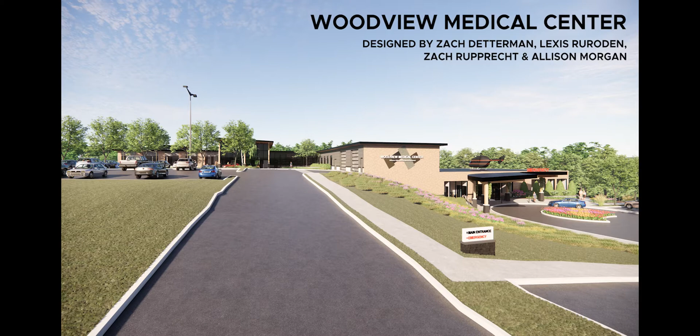The city of Adel and its surrounding communities are underserved regions for healthcare services. Currently, the closest emergency department is located in West Des Moines, Iowa, a 20-minute drive away. Additionally, there's a lack of preventative care in the area.

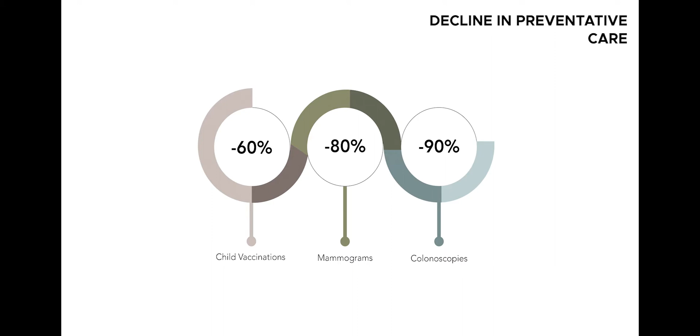According to the American Medical Association, preventative care declined during the height of the COVID-19 pandemic. Child vaccinations were down by 60%, mammograms were down by 80%, and colonoscopies were down by 90%. As a result, healthcare professionals promote telehealth to offer greater flexibility in healthcare and accommodate everyone's busy schedules. As Adel's population grows, demand for healthcare services will only increase.

Staff wellness is essential, and it heavily influenced our design. In the United States, 83% of hospitals provide workplace wellness programs, 63% offer health screenings, and 31% provide health coaches. To aid in staff wellness, we have implemented comprehensive programming into our building, such as an indoor fitness center, decompression rooms, and break rooms, to name a few.

Other design drivers go beyond staff wellness, including patient privacy, natural views, and daylighting strategies. We also use sustainable materials and include stormwater retention and filtration systems in our project.

We aim to empower individuals with preventative strategies for wellness by programming fitness and nutrition classes, providing healthier food options throughout the building, and including telehealth rooms to offer connections between patients and remote specialists to encourage preventative care.

As we began to develop our concept, we broke down elements needed to create our intended experience for all users. Notably, some critical aspects were creating a nurturing, connected, and secure environment that provides nourishment, balance, restoration, privacy, and comfort. These aspects together will allow us to create an efficient and welcoming healthcare facility.

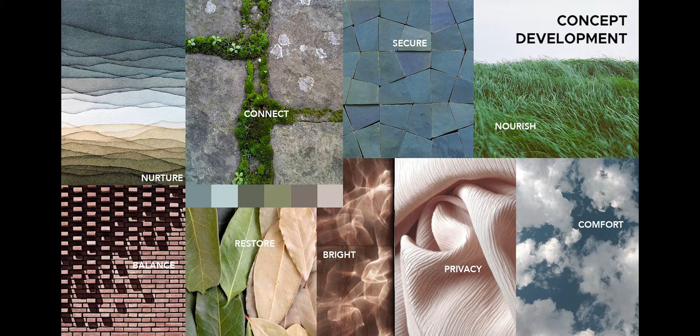With sustainability as one of our design drivers, we want to incorporate sustainable and durable materials throughout our design. Adel's brick plant allowed for locally sourced materials in addition to wood, stone, and concrete sourced regionally.

For the interior materials, it was essential to have durable and cleanable surfaces, such as a laminate wood veneer and bleach cleanable antimicrobial upholstery. For flooring, vinyl sheeting is used in high-traffic areas, while LVT planks cover personal spaces. Any wall covering within our building will be Type 2 vinyl wall covering, and paint colors associated with different departments aid in wayfinding.

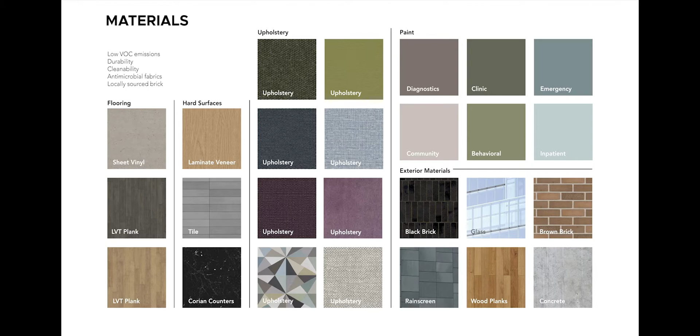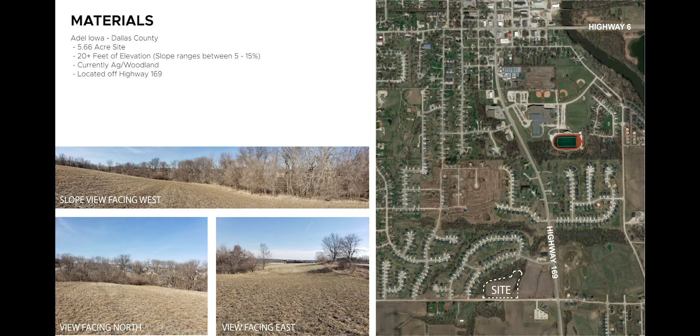Our site is conveniently located directly off of Highway 169. It is 5.66 acres and has 20 feet of elevation change, with slopes ranging between 5 and 15%. The site is currently agricultural and woodland, and we aim to keep it this way to provide natural views to our building occupants.

Our medical center is accessed via Meadow Road and has multiple points of entry. For patients, staff, and visitors, primary access splits into 2 roads to access either the main clinic entrance or the emergency department. There is also a service drive meant to deliver food, medical equipment, and a mobile CT lab.

Multiple gardens and walking paths have been incorporated for both patients and staff to enjoy. Walking trails connect between our several garden spaces and beyond the site to an existing trail system within Adel.

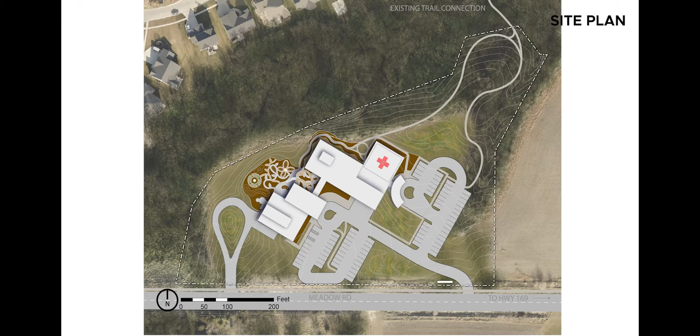Our building footprint started with an L-shaped design to hug our site and appear more welcoming to visitors during their approach. From there, we pushed our ground floor back to accommodate our site's slope, and we extended the corners of our footprint to fit in all of our departments.

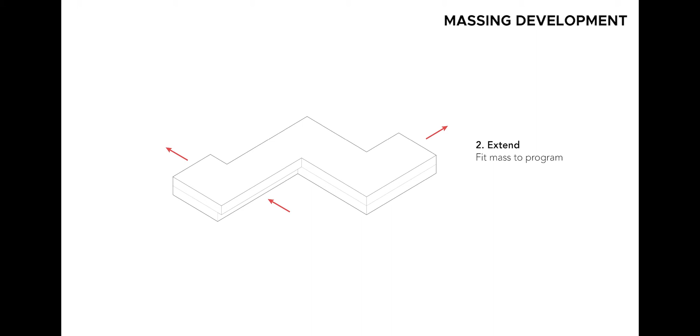We then subtracted portions of our first floor to allow for a rooftop garden and concealed helipad. We then decided upon our entry points and pulled those out to embrace our visitors and create a more prominent look.

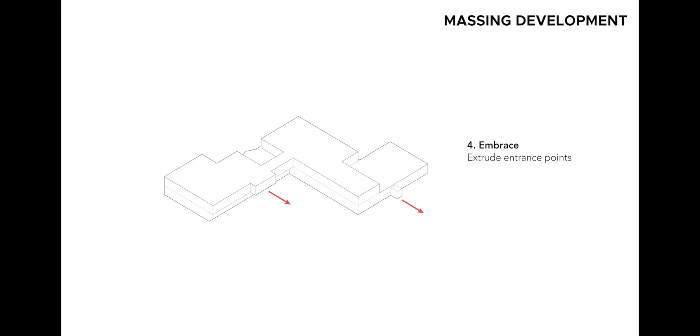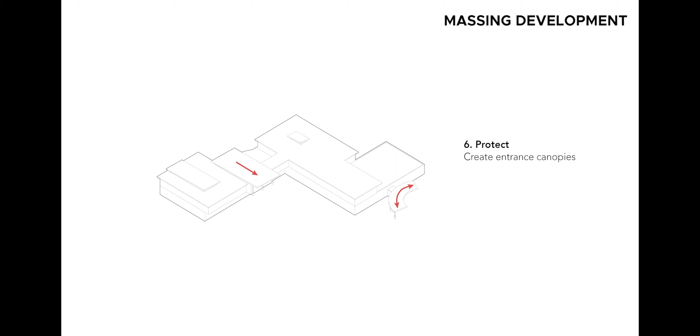To connect staff to daylight and nature, we placed clerestory windows above major work areas. Lastly, we included canopies over our entrances to make them even more prominent and protect our occupants from the elements.

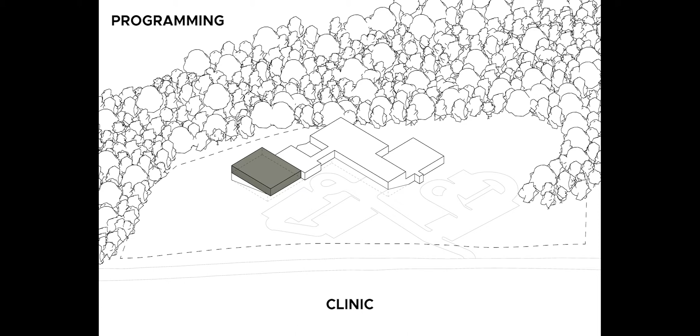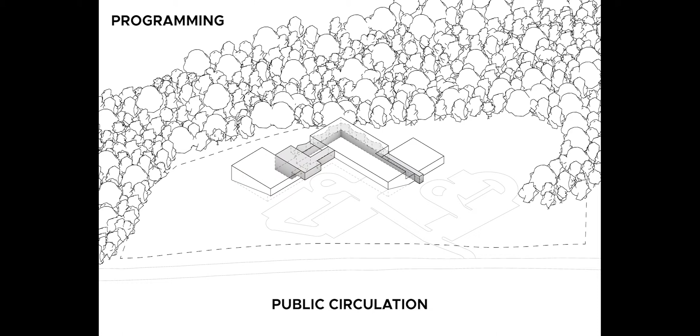Our building program is split into ground floor and a first floor. The first floor contains our clinic, rooftop garden, inpatient unit, ambulance garage, and helipad. Our lower level includes behavioral health, emergency department, diagnostic and lab, nutrition services, building support, and circulation bridging the 2 stories.

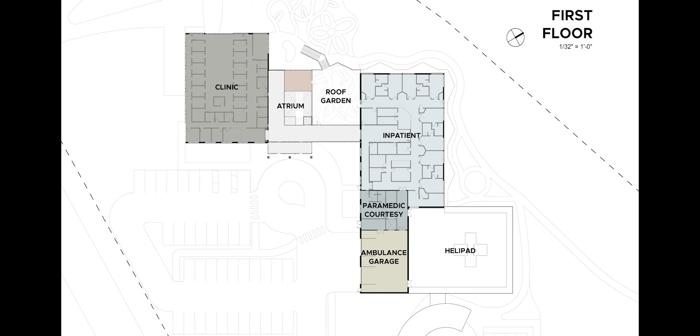The helipad is adjacent to the ambulance garage and paramedic courtesy, sitting directly above the emergency department and behavioral health department. On the ground floor, the emergency and behavioral health departments are adjacent to one another, with diagnostics and labs centered within the building.

The lower level atrium joins the community room and building support, which hosts staff wellness and nutrition services.

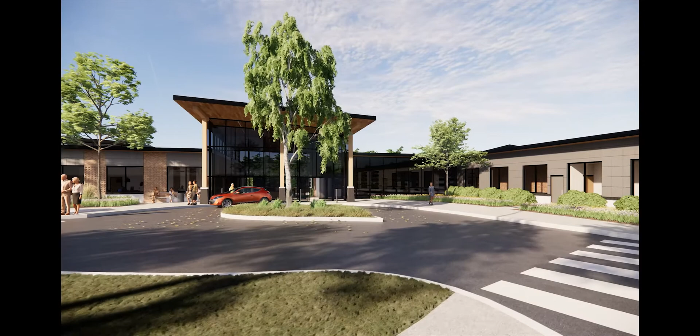Moving on to the main entrance, we have a large atrium that you are greeted with upon arrival. This immediately draws you in, and once inside, you can take a left to visit the clinic or a right to visit inpatient services.

The exterior materials here are brick, metal paneling, and concrete. This provides variety and a unique contrast that changes throughout the day with the play of light and shadow on the protruded bricks.

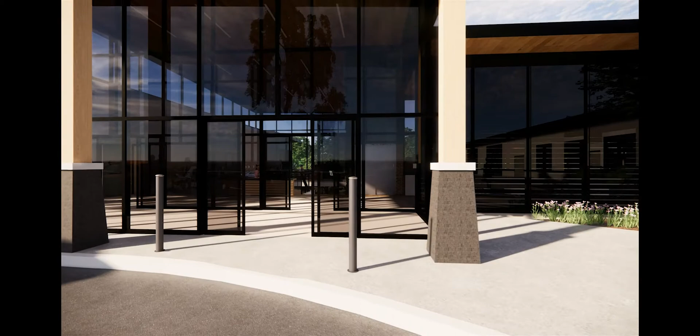Through the main entrance, a large atrium features multiple seating options, personal device support and charging stations, and a cafe towards the back. There are two points of entry for the rooftop garden that lead to a lower patio and garden space.

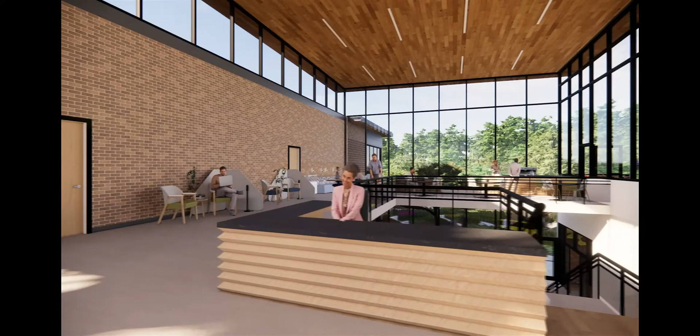Large windows provide natural views, encouraging users to go outdoors while letting in natural daylight. Integrating a green wall pulls natural elements indoors. Various seating preferences and group sizes are accommodated to be used by both patients and visitors.

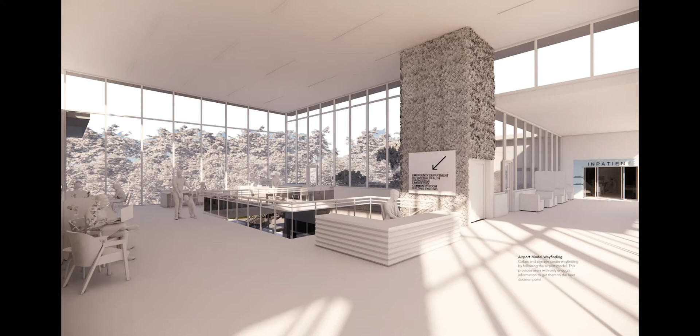Colors and signage create wayfinding by following the airport model. This provides users with only enough information to get them to the next decision point, lessening patient stress and confusion as they navigate the building.

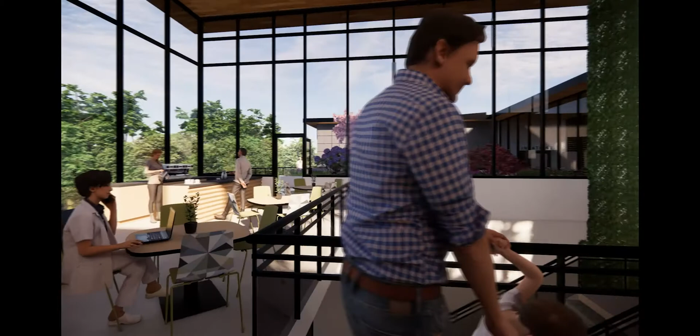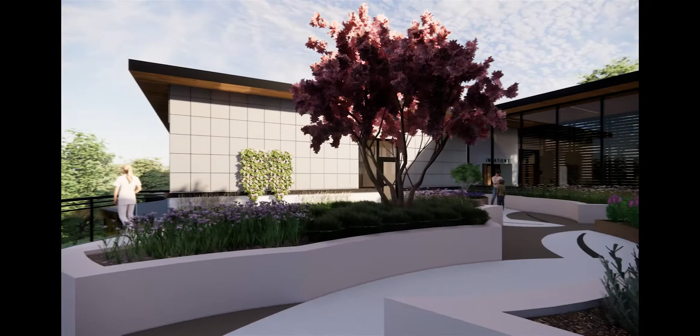Our roof garden is next to the atrium, highlighting design drivers of staff wellness and natural views. This is a place to go when patients and staff need a break, while also providing access to the lower level sensory garden.

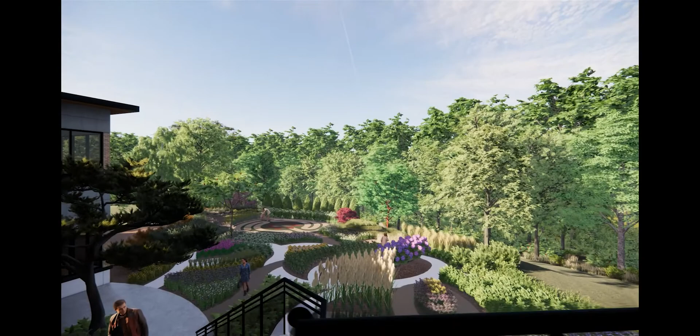To give independence and freedom to our patients, we provide self-rooming technology. The onstage-offstage model put in place here in the clinic allows for this by concealing staff work areas.

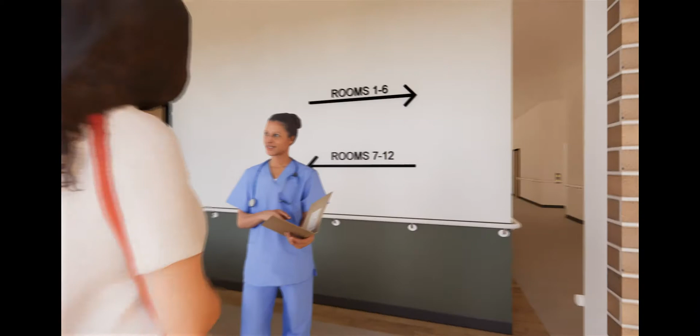As the patient ventures from the waiting area into the corridor, illuminated signage helps to indicate which room is ready for them to enter.

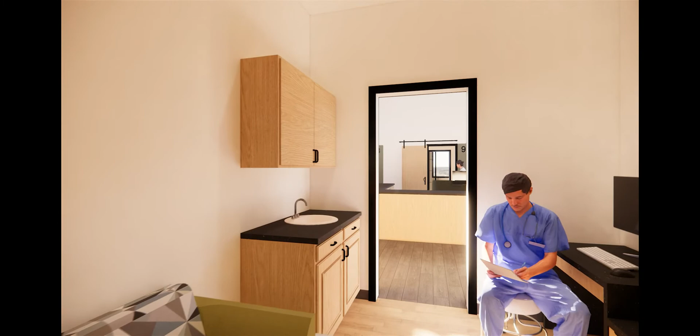Adjustable height desks stimulate productivity and feature privacy panels. Caregivers have a designated location for quick informal meetings without compromising sightlines.

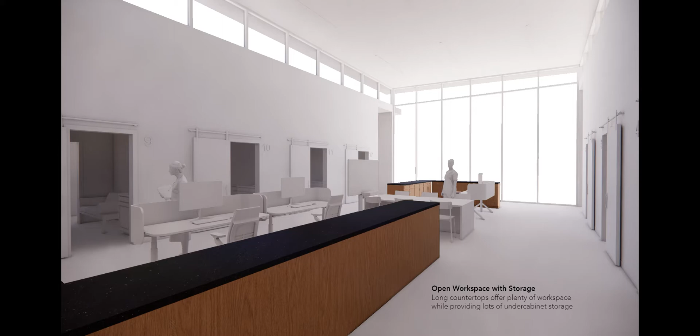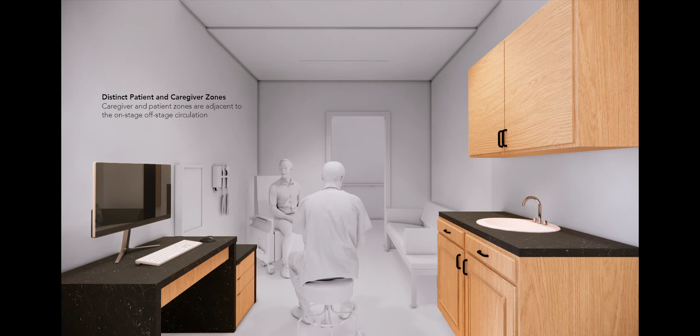Caregiver and patient zones are adjacent to the corresponding doorways for the onstage-offstage circulation, clearly defined by casework placement. Touchscreens can be used by caregivers to help explain medical terms and processes to the patients.

Hard surface allocates space for personal items out of the patient's way. Caregivers are at the same eye level as the patient and visitors when conversing. Bench-style seating is able to accommodate multiple visitors.

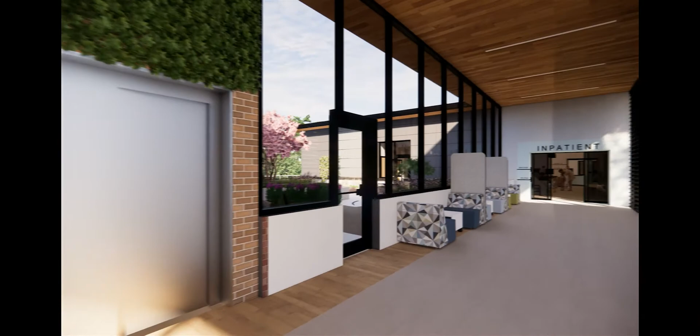The inpatient department is located close to the main entrance to provide easy wayfinding for visitors, while also being in close proximity to the emergency department for patients who arrive there and need to be admitted.

The patient rooms are aligned along the exterior walls of the department with an angled head wall to encourage patient views of the northern landscape.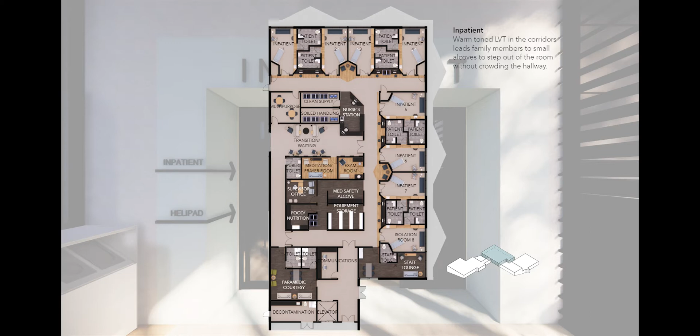A cornered nurse's station allows patient visibility along with windows at each patient room. Inpatient rooms and high-traffic corridors continue with neutral vinyl sheet flooring to highlight public access.

Warm-toned LVT in the corridors leads family members to small nooks where they can step out of the room for privacy without crowding the hallway. The dark LVT divides public corridors from staff-only hallways.

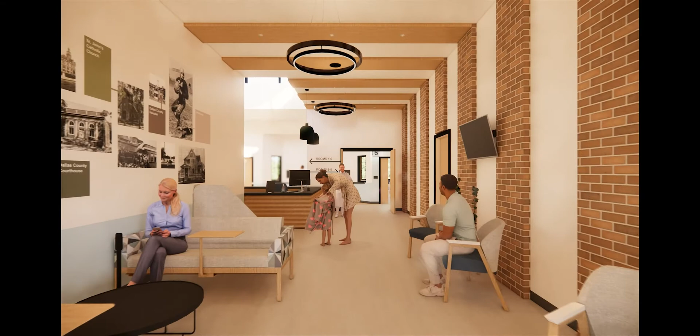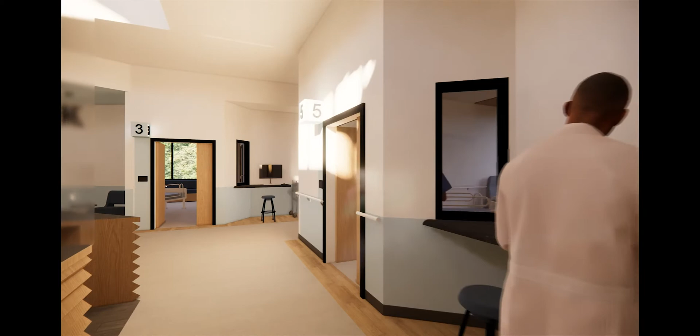Moving beyond a transitional waiting area, the inpatient rooms are adjacent to decentralized nurses' stations, with a window view into the rooms while also providing a designated space for carts in the corridor, keeping hallways clear for patients, caregivers, and visitors.

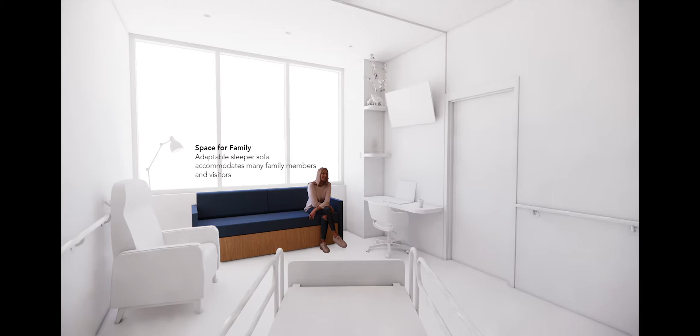An adaptable sleeper sofa accommodates many family members. Angled bed orientation and large window bays encourage the patient to enjoy the wooded views.

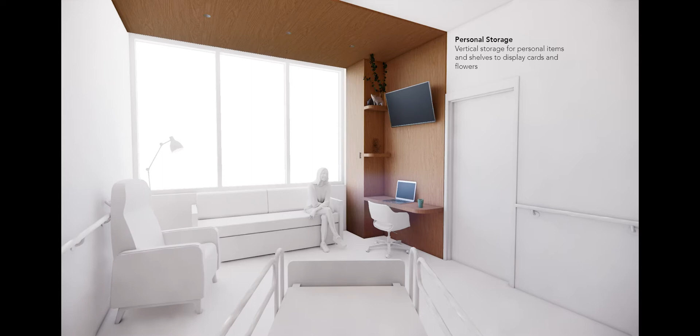This adjustable reclining chair is to be used by both the patient and visitors. Vertical storage is perfect for personal items, and open shelves allocate space for cards and flowers. A built-in workstation provides family members and visitors a place to be productive during long visits.

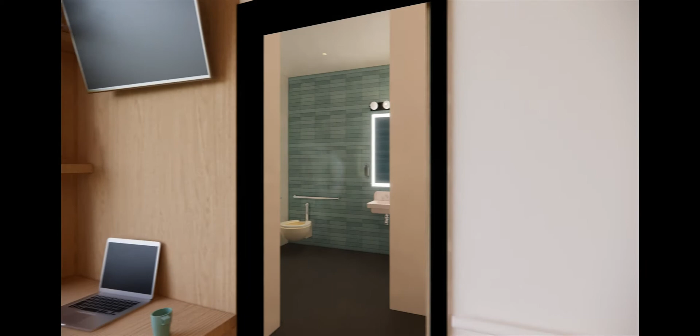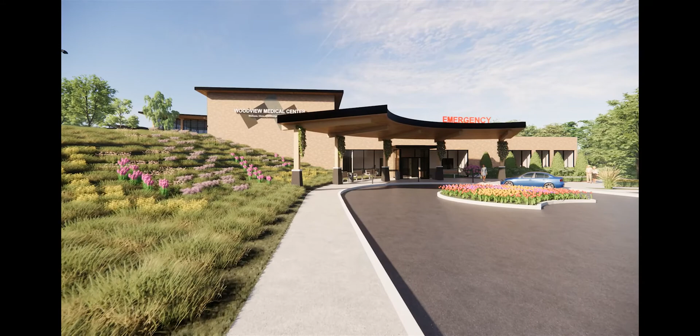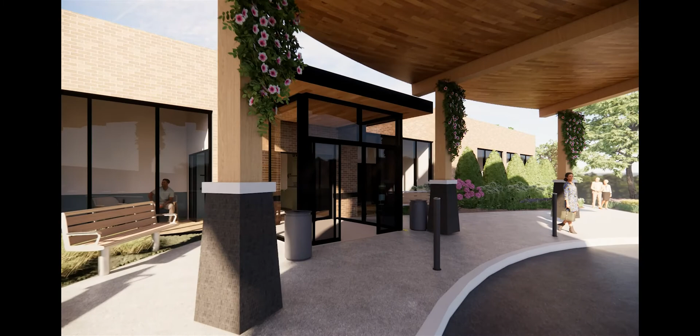The helipad is located on the roof of the building to provide an elevated flat surface for landing due to the site's complicated slope and quick access to the ambulance garage and emergency department.

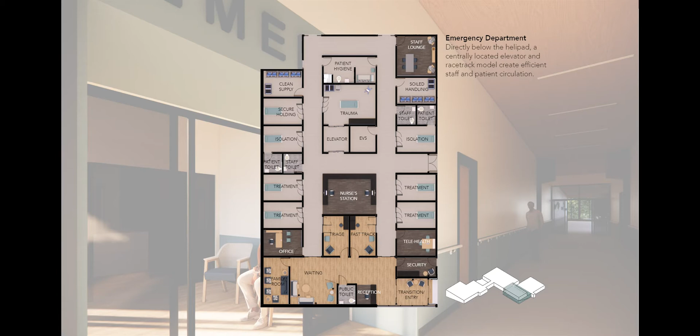Directly below the helipad, a centrally located elevator and racetrack model create efficient staff and patient circulation. Our racetrack model is highlighted with LVT flooring that pours into the treatment rooms, while the staff lounge, nurses' station, and other administrative work utilize dark flooring.

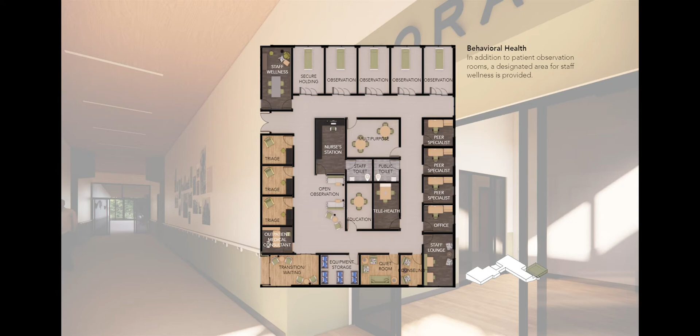Following our staff wellness design driver, a designated area for staff is provided in addition to patient observation rooms. This area is designed to be a check-in for staff where they can talk to a specialist and get a mental health screening. Like the emergency department, high traffic and multi-use spaces in this department are indicated with a neutral LVT.

The emergency department has a separate entrance to provide easy wayfinding and immediate access to ensure swift treatment times.

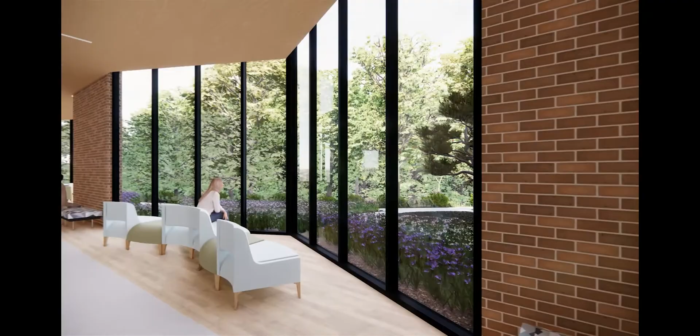We placed behavioral health in close proximity to the emergency department in order for critical patients to be nearby essential services.

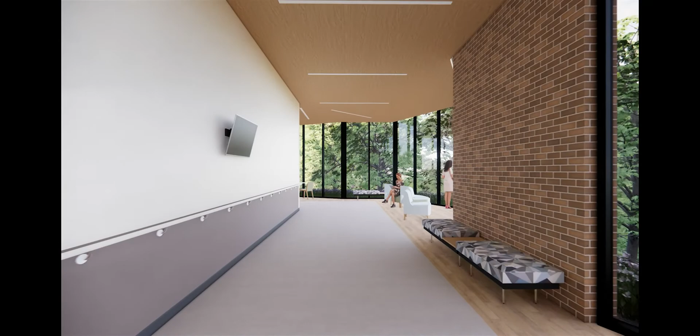To allow for staff flow and surge from the emergency department, diagnostics are located nearby to allow short staff travel distances and faster diagnosis.

The diagnostic and laboratory offer many important spaces such as radiography, CT, and mammography. Most of the flooring in this department is vinyl sheets for increased cleanability, and few staff spaces reside in this department due to the adjacency to the staff break room.

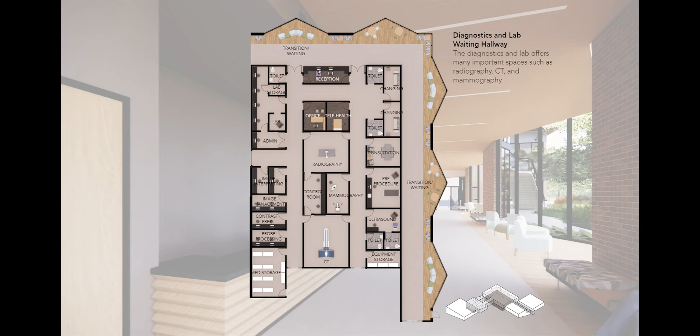The large hallway adjacent to this department creates an adaptable space that provides various seating for waiting. This space can be easily converted with privacy screens to accommodate for testing or vaccinations. LVT planks show the self-rooming patients where they can pause and wait.

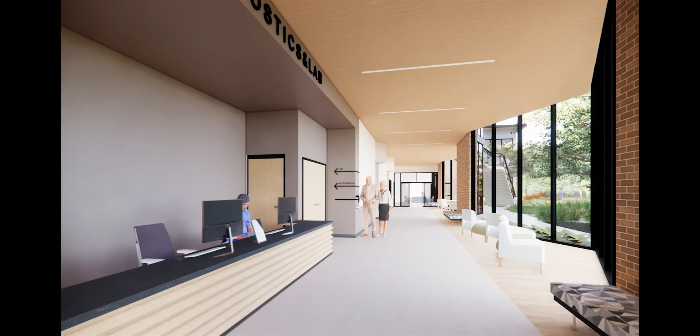In order to provide better patient and visitor access, the cafeteria is located off the main atrium, while the food storage spaces are located in the building systems zone near the loading bay.

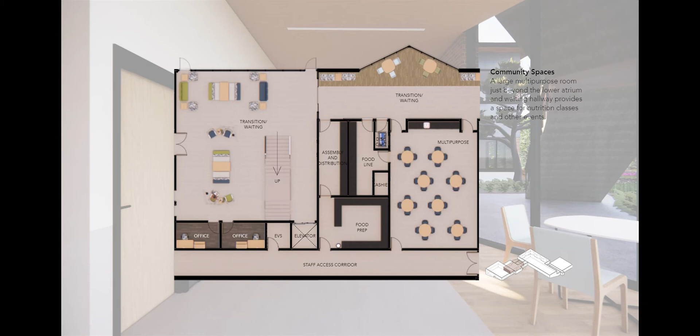A large multi-purpose room near the lower atrium and waiting hallway provides a space for nutrition classes and other events. To provide an adaptable space, food services are adjacent to accommodate dining services for events.

Building support can be accessed by the service drive for food and medical equipment deliveries. This department is occupied only by staff, so a large staff break room and wellness amenities have been incorporated to allow for natural views and rejuvenation away from the busy corridors and patients.

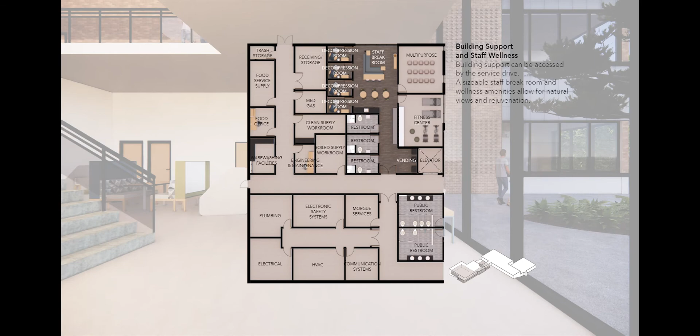Due to the traffic of carts in this department, general vinyl sheet flooring has been used for durability and cleanability. However, the staff break room and decompression zones are indicated by a darker LVT flooring.

The main landscape on site is located directly off the atrium and roof garden spaces. This planted area allows respite to all users, whether they're staff on a stressful shift or patients waiting for lab results. Plantings provide sensory stimulation, and intimate spaces are inserted periodically along the paths to allow for privacy and quiet contemplation.

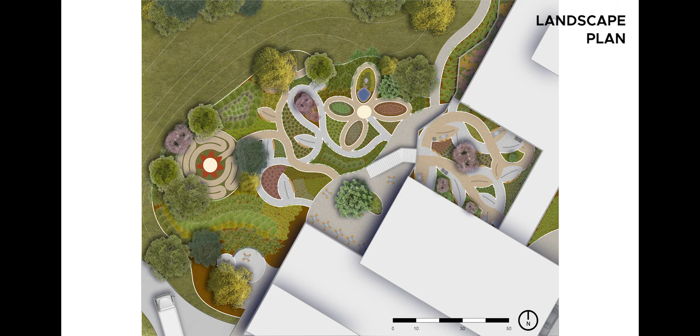From within the landscape, visitors are surrounded by greenery, and features such as this labyrinth quiet a racing mind. Plantings provide sensory interest, and pathways encourage exploratory wandering.

The makeup of the exterior materials consists of brick, metal paneling, and precast concrete. In order to add texture and depth to the facade, we rotated every third brick 90 degrees so they protrude outward from the wall. This will add interesting shadows to our exterior throughout the day.

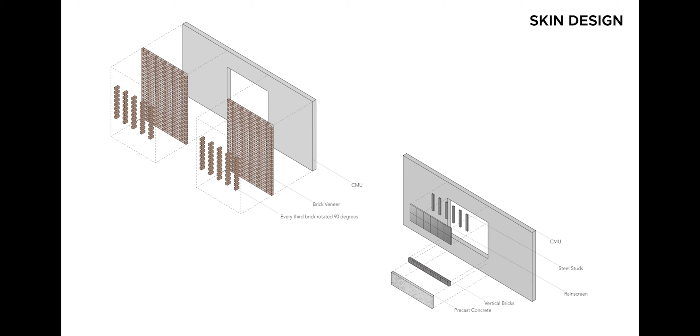We also incorporated metal paneling as a rain screen in order to protect our building from moisture, and although not shown here, we've added louvers to our southern facade as well to protect the occupants from any harsh lighting.

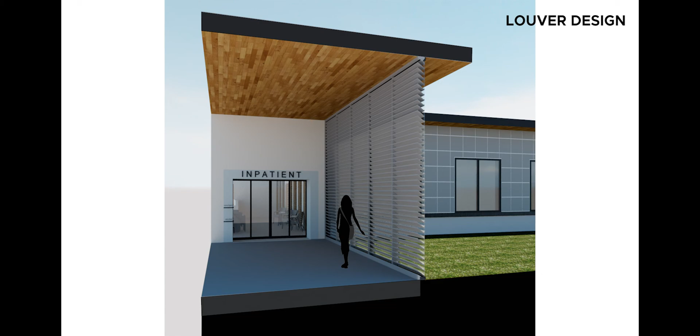Staff wellness, patient privacy, natural views, and daylighting strategies drove the design of the Woodview Medical Center, as well as an emphasis on preventative care. Offering flexible, adaptable, and convertible spaces to accommodate future needs will help empower individuals to take charge of their health and create a healthier community in Adel, Iowa.